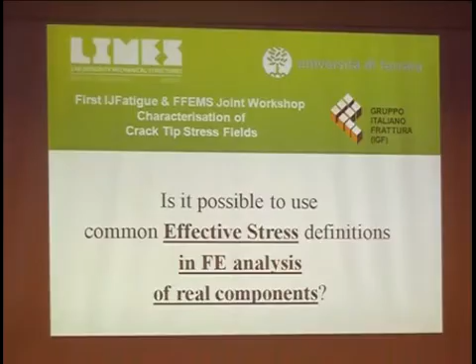So the actual title of my talk is a question: is it possible to use common effective stress definitions in finite element analysis of real components? Another preliminary note: you will see several questions in my presentation. My talk is not a completed research activity, so we will see several questions. At the end, if you have the answer, it's really welcome.

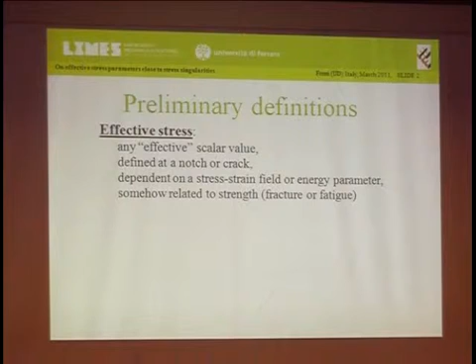In the following, I will call effective stress any effective scalar value defined at a notch or a crack, dependent on stress, strain field, or strain energy, and somehow related to strength in fracture or fatigue strength.

In this talk, I will focus first of all on linear elastic analysis, and the assessment of high cycle fatigue strength. For instance, notch sensitivity in fatigue is defined as KF, which defines an effective value by multiplying this coefficient by the nominal stress. This is just an example.

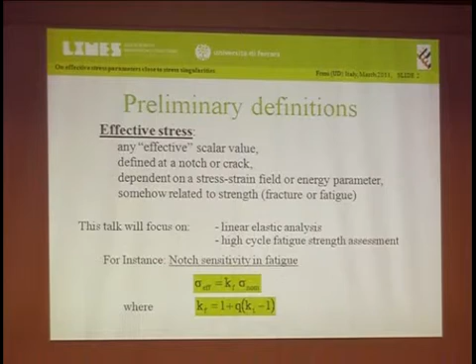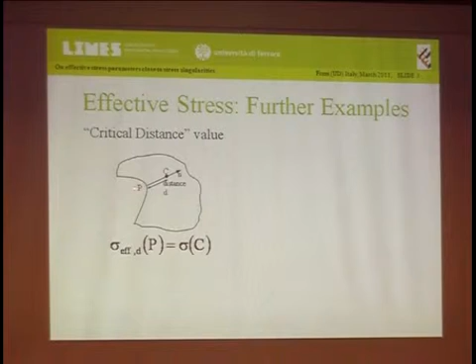But another example of effective stress definition is the critical distance value, which is widely known and widely used, for instance, by Professor Taylor. The idea, may I say, is simple: the strength at point P is related to a stress component evaluated at a given distance D.

Another possibility is an average value. So the strength of point P is related to the average value of a stress component evaluated on a domain A. This domain can have several shapes and geometrical properties. In this example, and in the following, we will consider the semicircular domain, but we have seen even this morning, or in previous presentations, other examples such as the circular domain.

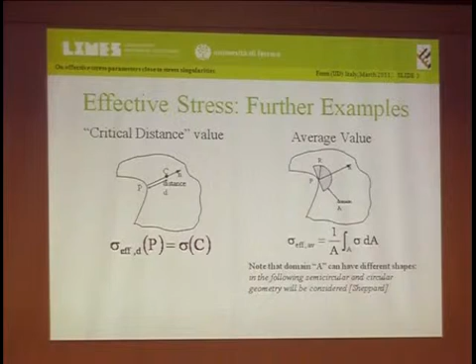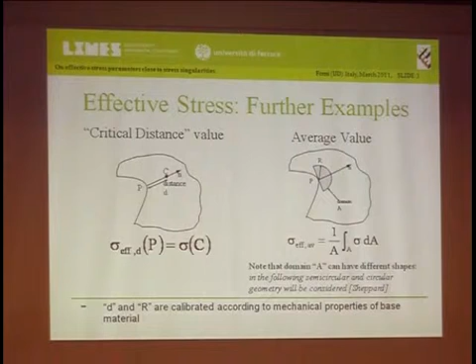In both of these definitions, the distance D and R are calibrated according to mechanical properties of the parent material. Another property is that you can use the effective definition to deal with the stress gradient. I'd like to highlight that you can separate the problem of the gradient from the problem of the strength criteria, the multi-axial problem, so that you can use any kind of stress parameter as equivalent stress here: principal stress, shear, invariants, strain energy density, and so on.

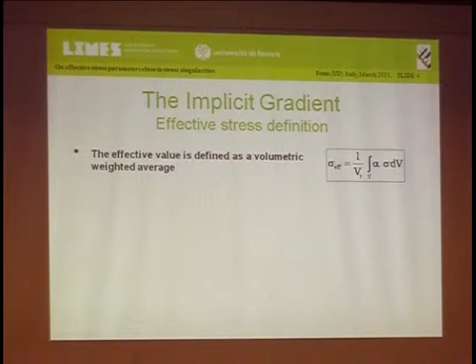If alpha is something like a Gauss curve or a quadratic weight, you can approximate this equation with a partial differential equation. So instead of solving this integral, you can solve this partial differential equation by a proper choice of boundary conditions.

Like D and R, in this case there is a constant C that is a length and is related to the property of the material. The partial differential equation can be easily solved by several numerical tools, such as Comsol Multiphysics. Just to give you an idea, it's much easier to solve this equation from the numerical point of view than the linear elastic problem itself.

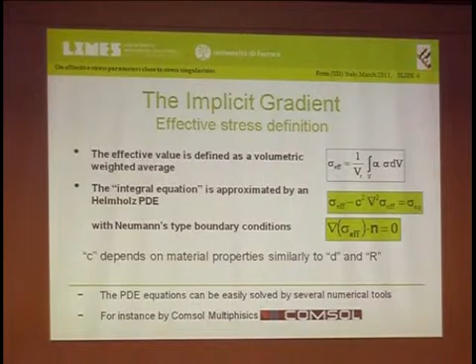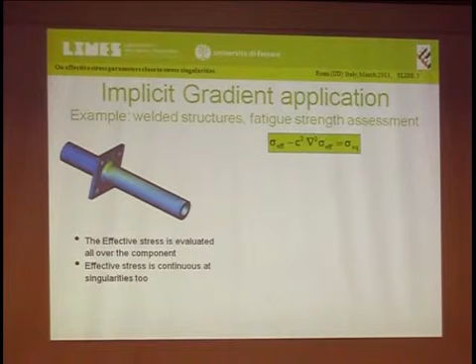As an example, if we consider a welded tube, we can apply this equation to the stress field. We can use the principal stress as an equivalent stress, and we obtain the effective stress evaluated all over the component. This picture gives the effective value. So at the tip here we have a stress singularity, but the effective value is finite and continuous all over the component. So it's possible here to obtain a value, and in this case, this value is related to the strength, the fatigue life of the welded joint.

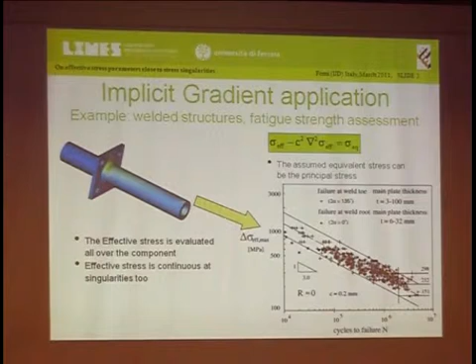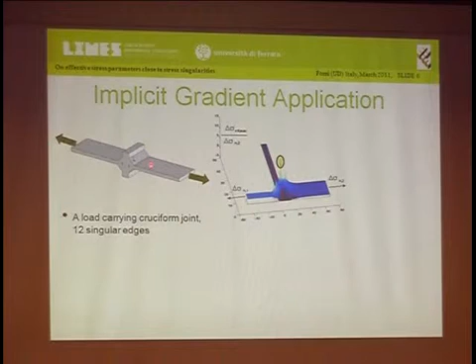We can evaluate this section, and we have plotted on the z axis the amount of the effective stress. You can compare directly the different maxima, and assess or estimate the actual critical position, so where the crack is going to initiate. And this value is again related to the fatigue life.

I would like to highlight that we have done a possible critical step from the previous definition to this definition. It is different from the methodological point of view, and the main difference is this.

In critical distance and average stress, first of all, the critical point is known or assumed, and then the effective stress is evaluated at that critical point. In this approach, the effective stress is evaluated all over the component, and then the critical point is the location showing the highest value of the effective stress.

Is this method safe? First of all, is a critical point assessment really necessary in real components? Because if the critical point is always well known, this paper is meaningless. The second question: is there any problem in this approach?

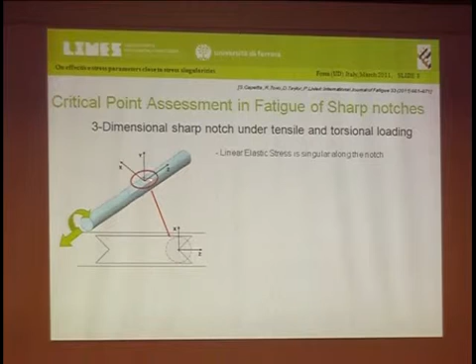Let's consider this example: a specimen tested in the lab of Professor Taylor, and the results have been recently published. This is a rather strange specimen because it is a three-dimensional V-sharp notch. The notch is sharp in both directions, here and there.

We have done a linear elastic analysis, and obviously all the edges show a singular distribution of the stress field. But if this specimen is loaded under tensile or under torsional loading, where will the crack initiate under fatigue loading?

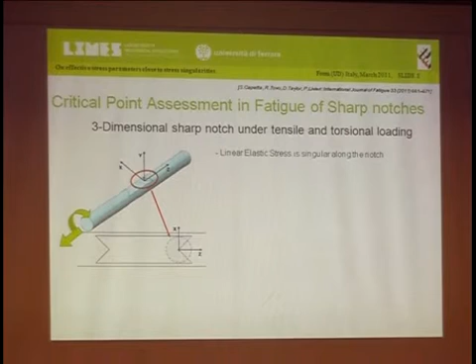With the implicit gradient, we have investigated this specimen, and it turns out that the critical point could be different under tensile and under torsional loading. And this is confirmed by experiment.

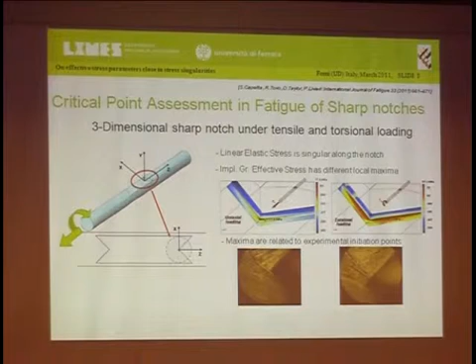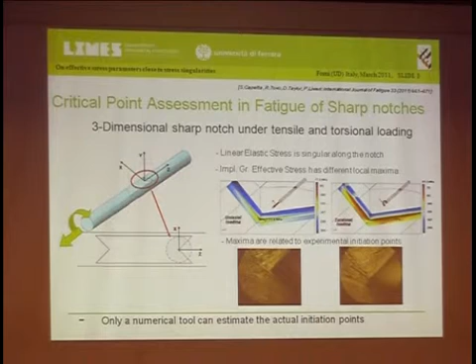This picture was taken there, and you can see in this case a crack starting from the tip, and in this case one crack starting from the edge. So, in our opinion, only a numerical tool can estimate the actual initiation point in a complex three-dimensional component.

If I tell you that there are many questions in my talk and not enough answers, it's because there are several problems.

As an example, let us consider a simple crack under mode 1 loading. If I compute the effective value with the implicit gradient, the actual maximum is not at the tip, but is moved ahead of the tip.

So when I calibrate my criteria, I have to choose which critical point should be considered for calibration, as an example of the constant C - should it be chosen according to this value or that value? The difference is small, but from the methodological point of view it is completely different, because you are changing from the actual tip to the maximum of your effective stress definition.

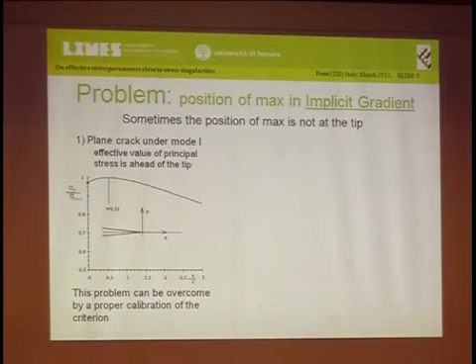Another problem, but in this case I'm not sure it's really a problem: if we consider a spot welding under tensile loading in a lap joint, the spot is mainly loaded by mode 2, a shear.

The implicit gradient has a maximum value that is not at the tip, but is moved along the free edge. And even in experimental tests, sometimes it's possible to find cracks initiating not at the tip, but along the free edge.

Usually these initiations are related to the non-homogeneity of the material at the weldment. But we have even seen, as mentioned by Professor Berto previously, that in these cases there are several stress components - I mean the singular terms, the T-stress, the out-of-plane singularity.

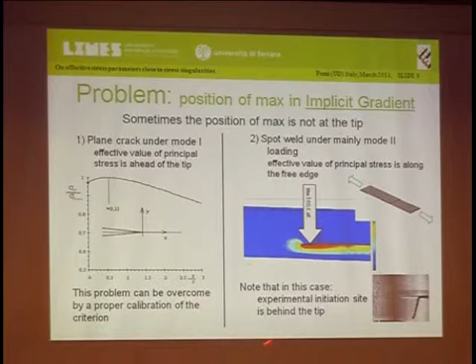So in this case, starting from a three-dimensional stress analysis, within this computation - from a numerical point of view, not a theoretical one - each component is involved.

So the general issues are: are effective value stress parameters really maxima at the expected failure position? Are there considerable differences by changing the stress parameter or by changing the effective value definition?

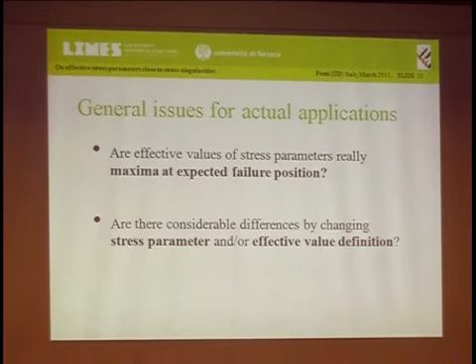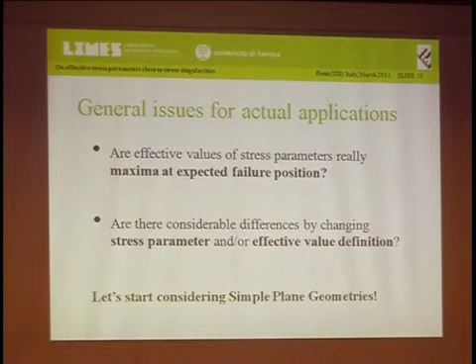In this second part of my talk, I will only consider a very simple plane geometry, because I think that if there is a general problem, it's probably better to understand it on a plane, simple geometry and then try to go back to the three-dimensional problem. So let us investigate the free edge of a sharp notch.

This is not really a sharp crack, because I've used a small radius rho in order to have a continuous definition of the effective stress along the free edge. If here the radius should be 0, there is no possibility to have a continuous definition of the average stress and even of the critical distance.

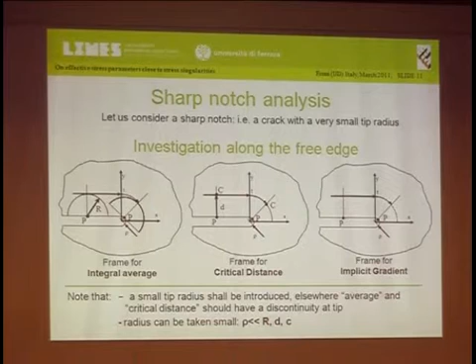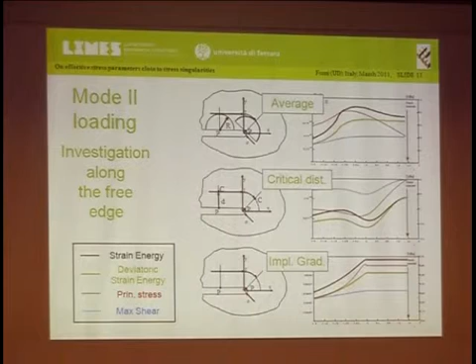If we consider the mode 2 loading, the situation is even more complex, but we have seen in the welded joint that in mode 2 there could be several further components in actual specimen.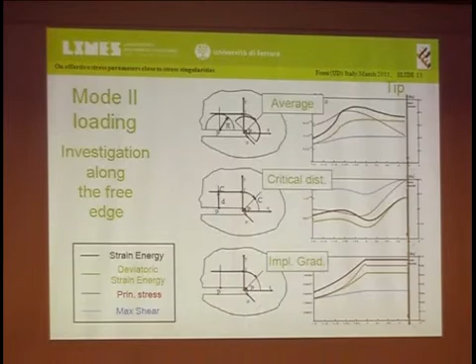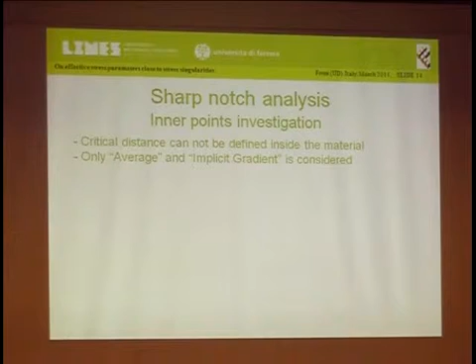So, going to the conclusion, the last investigation is not on the free edge, but within the material, so inside, ahead of the tip. And in this case, the critical distance cannot be defined, because there is not the normal to the surface if I am inside the material.

So, inside the material, I can use only the average value and the implicit gradient to make a comparison. And in this case, I use a circular domain, because inside the material, since it's not available the normal to the surface, it's not possible to give the proper orientation of the semicircular domain. So I have to use a domain that is symmetric and a circular one. And this is the used frame of reference.

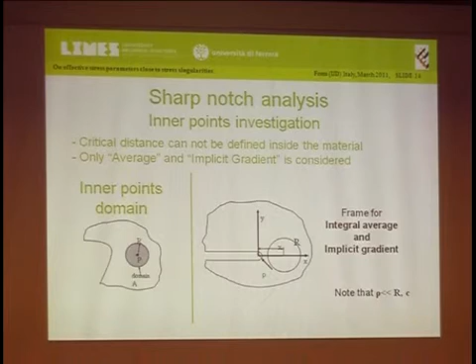And the results are these under mode 1 loading. So in inner point investigation, moving ahead of the tip, both the implicit gradient and average value has local maxima higher than the tip value, just ahead of the tip. So, the problem of dealing with maxima at locations different from tips is common in both definitions.

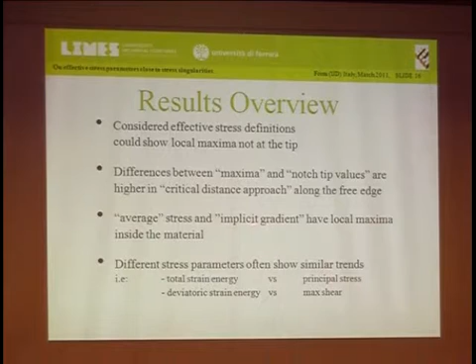So, the overview of the obtained results: consider the effective stress definition could show local maxima not at the tip. Difference between maxima and notch tip values are higher in critical distance approach along the free edge. But the same problem is present in implicit gradient and in average value inside the material. And I've not underlined that actually there are different parameters that show similar trends.

For instance, if we could have enough time, we should verify that the total strain energy and the principal stress have similar trends, and another similarity is between the deviatoric component of the strain energy and the maximum value of the shear stress.

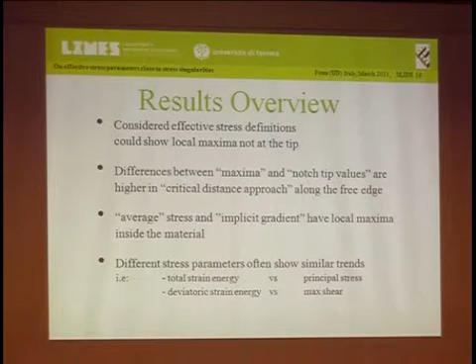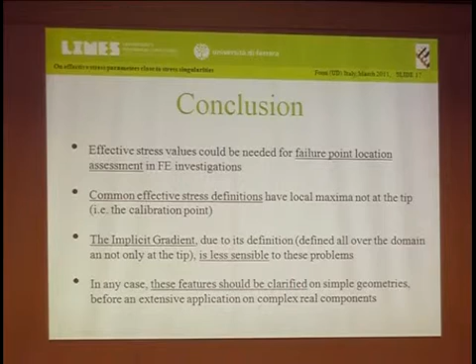Then the conclusions are: effective stress values could be needed for failure point location assessment and in finite element investigation, particularly in very complex components. And common effective stress definitions have local maxima not at the tip. The implicit gradient, due to its definition, is less sensible to this problem. And in any case, these features should be clarified on simple geometries before an extensive application on complex real components. Thank you very much.

I've got a commentary question, right? Yeah. You mentioned at the beginning, going from the integral approach to the differential approach, the implicit approach.

Yeah, there's an approximation depending on alpha. If you take alpha as the Green's function, then there's no approximation, it's exact. So that's nice. If people take that approximation, you can get away with having a one-to-one correspondence if you take for alpha the Green's function. I agree with you, but the problem is that if you change alpha to the Green function, you are not able to approximate the integral with such an easy partial differential equation. So the partial differential equation turned out to be more complex. Maybe it's a different Green function. The Green function I've seen gives exactly that differential equation that you showed.

Actually, that's something we could verify. If I remember, when you change from the integral equation to the partial differential equation, you're doing a series expansion of the weight function. As a matter of fact, you only take the first two terms of the function itself in this approximation. I know what you mean, there's something else, but okay.

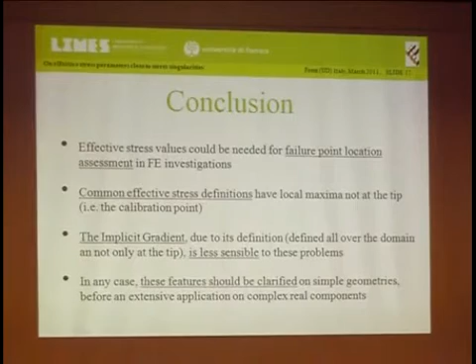There are some examples of failure mechanisms where maybe you have a crack and the crack advances, but it advances because something fails ahead of the crack tip and then the connection is made back to the crack, so the failure actually happens at some point ahead of the crack, whereas in other cases it goes the other way. So I don't think it's really a physical problem. You see what I mean?

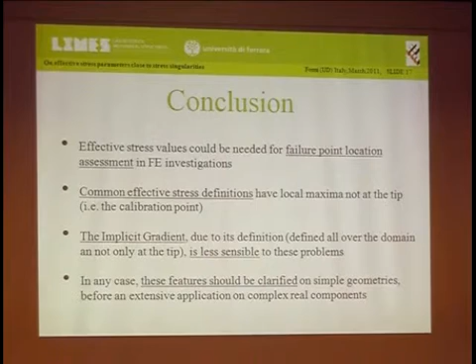From my point of view, the problem is mainly a methodological problem. So when you say you use effective stress at the failure point, you have no problem at all, because you're calibrating your approach exactly at the point where you're going to compute it. So it's a kind of, I don't know if it's right, a self-coherence, let's say. But when you say, now I want to address complex structures, you have to compute it everywhere, and you have to trust the result.

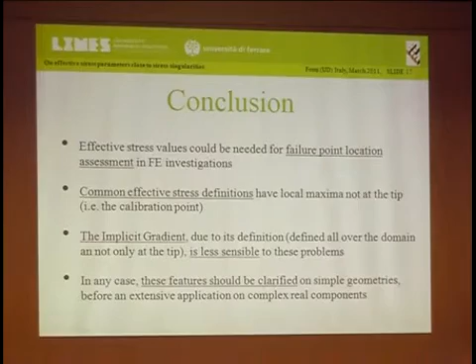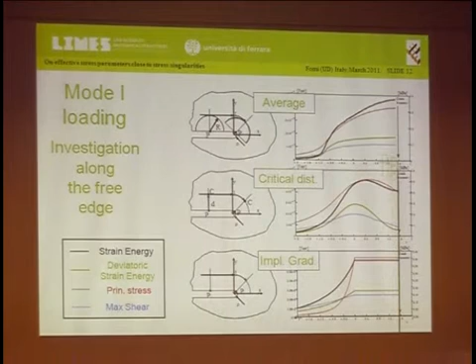Hence, the problems should be solved with the same method even in simple geometry. And the problem is here, no, not here. If I have this geometry and I calibrate the constant in order to have coherence for the prediction here, and the maxima is not here, it's there, you could have a problem because the prediction on simple geometry is not the right one. And the problem is the same here.

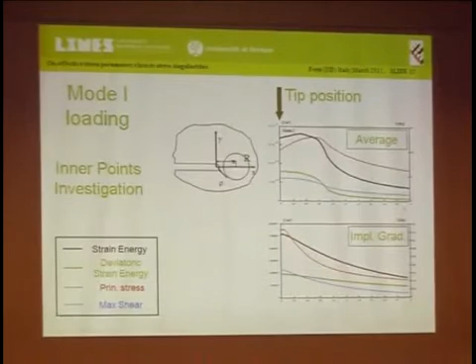So it's a problem, first of all, of calibrating the method at the right point in order to have a consistent approach on the complex domain. I don't know if I've been sufficiently clear. Well, yes, I think so, but you're saying you may find that your worst point is not the point on the surface. Yeah. So what? That's fine, I'm happy about that.

I think that's where the failure will actually occur, so I'm happy. Yes, but the problem is that in this case we already know that these maxima are not in the right position, because the failure is not there. That's okay.

There is an interesting paper by Westbrook on this geometry. He quantified the effect of three-dimensional effects and the presence of a strong out-of-plane mode due to mode 2 stress distribution. So the problem is really three-dimensional. In this case, in my opinion, it's necessary to use a volume approach. I'm not able to use anything else. Do you agree?

Yes, if you have solved the problem on a simple plane, first your method should be sound on simple geometry, then you can extend it to three dimensions. The other aspect is that the implicit gradient is defined in three dimensions directly, so you don't have the problem of defining the process volume. I think the implicit gradient could have an advantage in dealing with a three-dimensional problem.

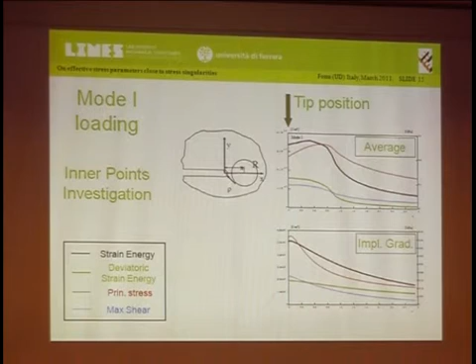Can I ask a simple question? If I took cast iron, and I took a series of bars and put different notch geometries in them, and then scaled them up by a factor of 10 - you're saying that if I pulled them or twisted them, this approach would tell me when failure occurs?

When I will have solved all the problem, in any case - where's the data for that? So the results apply to cast iron? Different notch geometries, different sizes? Tell me the papers afterwards, please. It's quite interesting - which of those would you use though? Strain energy, like, which one? Sorry, have I missed the point?

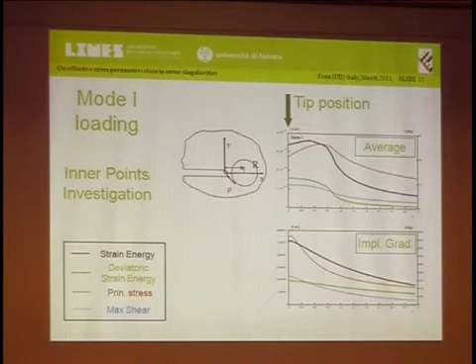The one you are going to use depends on the criterion you want to use. Oh, okay, I'm saying - so you're not saying which criteria to use, you're just saying be systematic. No, sorry, trying to explain the point of the talk.

Here in this picture, I can show you the trend of the implicit gradient applied to several possibilities: strain energy, principal stress, max shear. If you are saying, for instance, cast iron - I guess cast iron is more sensitive to principal stress, so I would use this.

Hang on, but would you, David, would you know a priori how that material behaved? Would you know beforehand which of those three to use? Four to use? In the world of fracture mechanics, we can't do that - we have to do experiments.

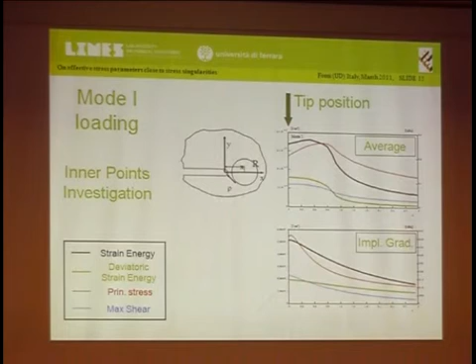Okay, so let's argue my argument. I take cast iron, I put different notches in it of one size. Then I look at all those four and find the best fit. Now I scale it up by a factor of 10, and the argument is you have data that says I choose one of those - let's say maximum principal stress. I choose the value C in his analysis, and I use that constant so I can scale it up.

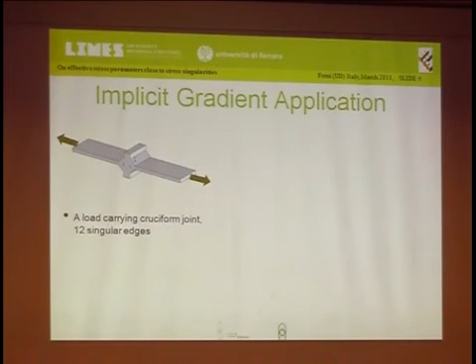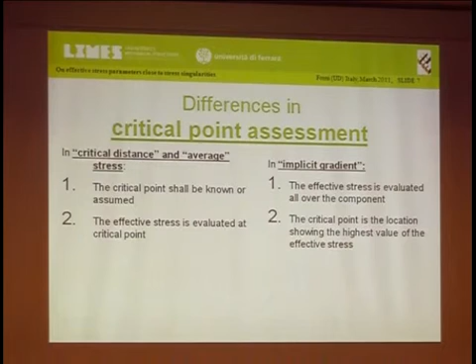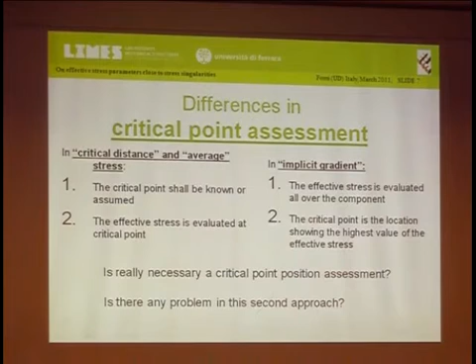No, so a short question, if I'm understanding - the problem is even the size effect. So if I multiply by a scale factor - no, I'm not arguing about scaling anything, I'm just saying if you do a set of tests on 10 millimeter and then change it to 100 millimeter, keep the same thing, keep the same C. Okay, show me the papers, boys.

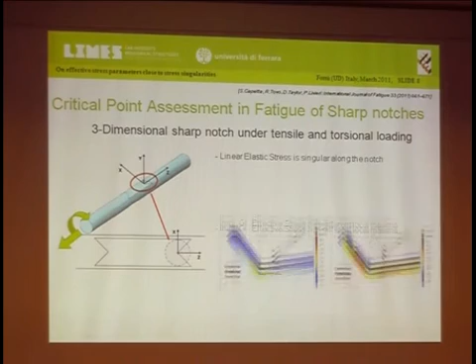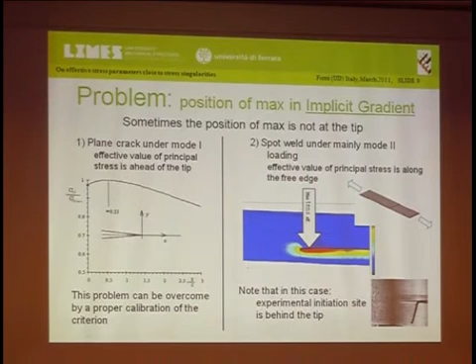Now there are some other effects, like - are you running out of time? Can you show that graph again where you compare average, critical distance and implicit? You had a couple of these. On the bottom curve, where is the crack tip again?